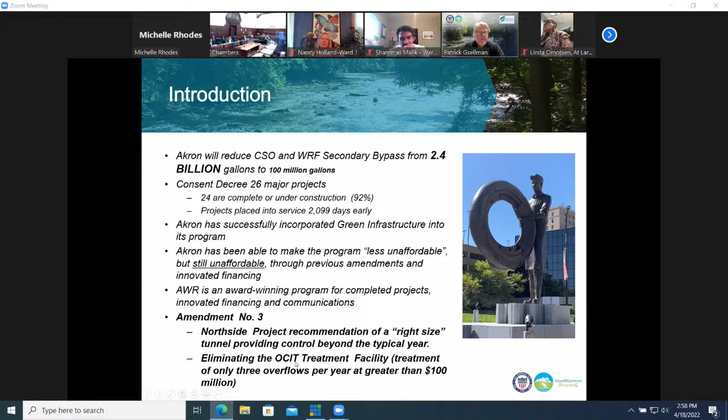And then again, today we want to talk about the Amendatory 3 that includes the North Side project and the elimination of the Ohio Canal Interceptor Tunnel Treatment Facility.

Just real quick, summarize some of the awards that we've received over the last few years, and we're very, very proud of these. Our mayor actually got an award from the state of Ohio, from the Ohio Water Environment Association for his efforts in regards to the environmental projects at Akron. And we've gotten awards for our communications that we've provided to our stakeholders and to the public and for our events we've had, and also engineering achievement awards for the projects themselves.

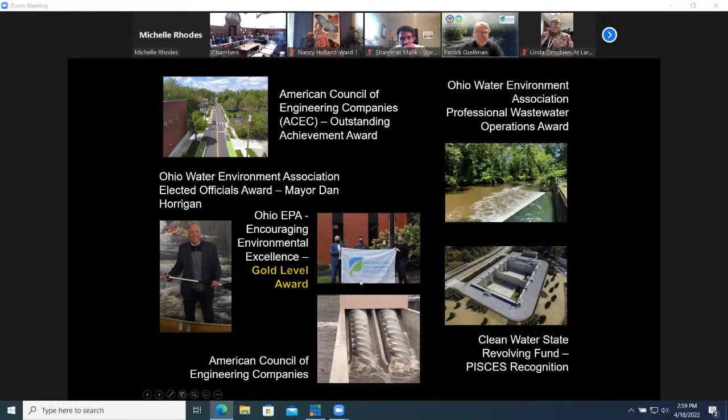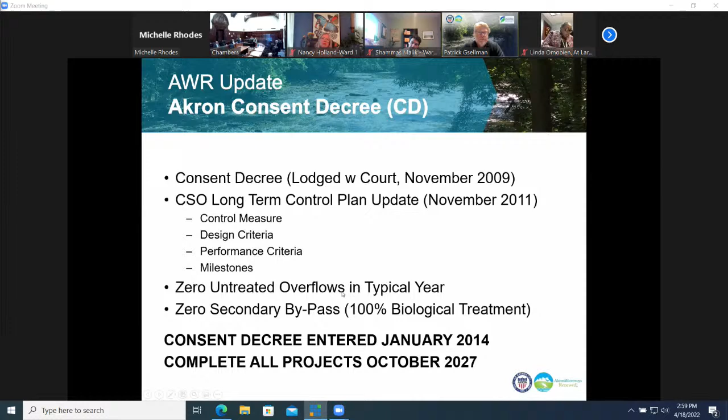A little bit of history. I don't want to spend very much time on this at all, but obviously we did have a consent decree that really got started back in 2009. It wasn't entered until January of 2014 in the court, and we still have the same completion date of October 2027. It does require 0 untreated overflows in what we call the typical year or average year, and it requires no secondary bypass at the water reclamation facility. And as the mayor noted, it is one of the most stringent consent decrees in the country.

We went through the integrated planning process back in 2015. Of these some 800 combined sewer overflow communities in the U.S., US EPA was finally realizing that every one of these projects were greatly exceeding their original cost estimates, and the majority of them required additional time. US EPA actually came up with a process called integrated planning to review these projects, to hopefully make them more cost-effective, more environmentally beneficial, and to help ease some of the financial burden.

Through that integrated planning process, we've come up with, up to this point, really 3 changes to the consent decree. One we call Exhibit 3, which was actually included in the consent to allow us to incorporate some sewer separation and some green infrastructure projects. And then the First and Second Amendment provided us to rearrange some of the schedules, come up with alternative projects to save money.

And specifically, the Second Amendment required us to incorporate green infrastructure, specifically out in East Akron, in the Middlebury neighborhood. That resulted really in some fantastic projects out there that not only eliminated having to build storage tanks, but allowed us to really do what I think are community improvements and enhancements with the green infrastructure.

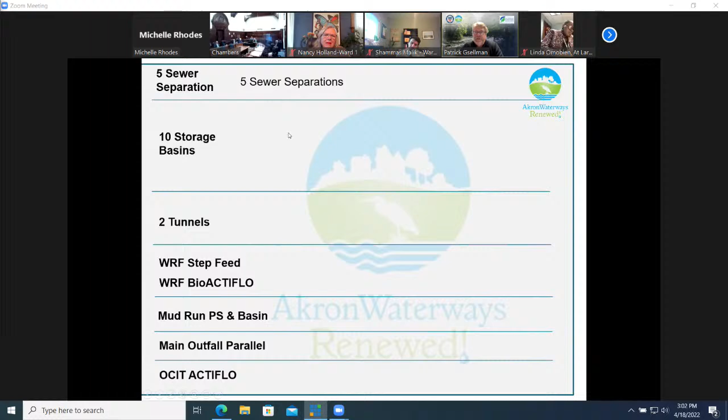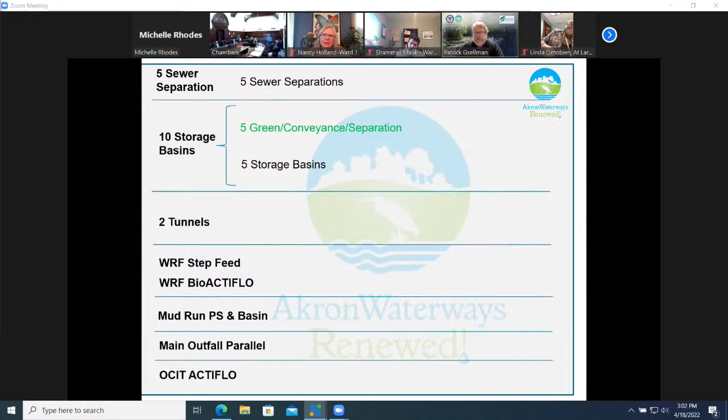Through the integrated planning process, we still did the 5 sewer separation projects. They were pretty much underway. Some of them were actually already completed. We did modify 5 of the storage tanks and provided green, additional conveyance and sewer separation projects. And if you're not quite familiar with what green infrastructure means, I've got some pictures later to kind of show you what those projects look like. Obviously, we did the Ohio Canal Tunnel. It's complete. The Northside tunnel is part of this third amendatory that we're talking about.

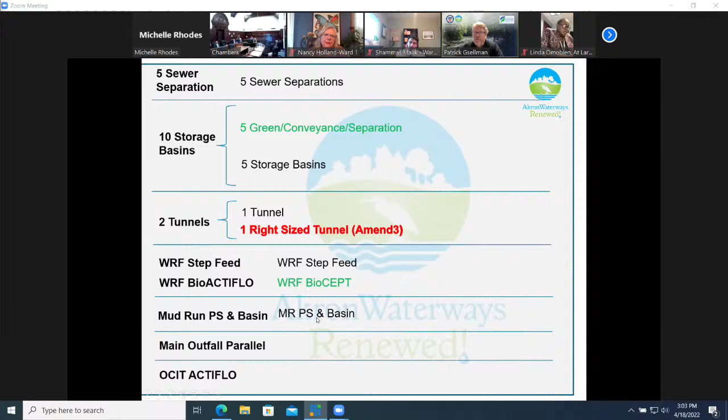We did 2 projects at the water reclamation facility. We actually changed the schedule of the step feed project, and we replaced it with a different technology at an improved cost, a lower cost, to treat the wet weather flow. Mud Run pump station was already well underway before we did the integrated plan. We did replace the main outfall with the main outfall cap, and OCIT ActiFlo is again under the third amendatory review. So these are the 2 projects that are left or under review as part of the third amendment.

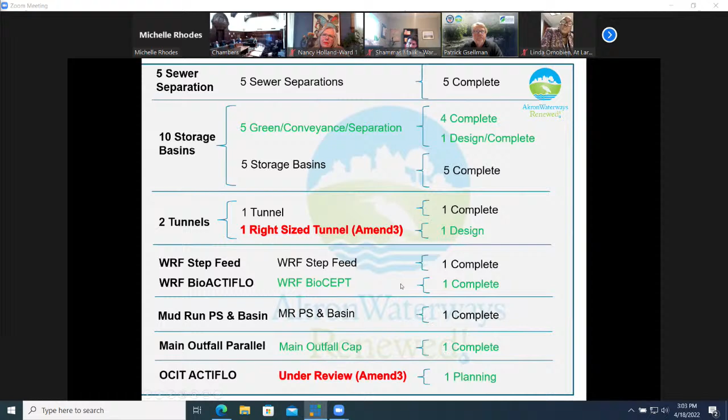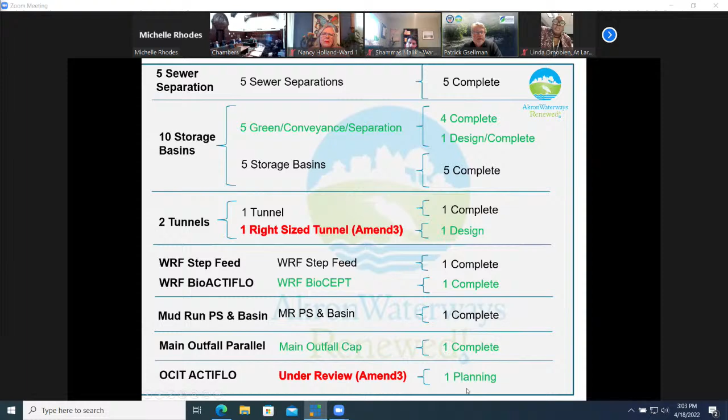And this gives you a quick update then on where we are with all the projects. The green ones are the integrated planning projects, and the black ones show the projects that were part of the original consent decree. And you can see the vast majority have been completed. It does show we're finishing up the second phase of one project down in Memorial Parkway. And we do then have the tunnels in design and the ActiFlo is in planning.

As the mayor mentioned, we've saved around $150 million in capital costs with the two amendments. And what I'm really proud of is our staff has been able to work with the Ohio EPA to come up with actual financial savings by getting these unbelievably low interest rates for all kinds of different criteria in order to save approximately $142 million just in financing. And we hope with this latest amendment we could save around $140 to $150 million with these future projects.

And then I'll give you a constant reference back. We started at 2.4 billion and now we're talking about 100 million gallons of overflow. Graphically, this shows what it looks like. We've completed, again, 92% of the projects. We've got one that's still under construction. And a huge price tag on the remaining 8% of the projects, or 2 projects.

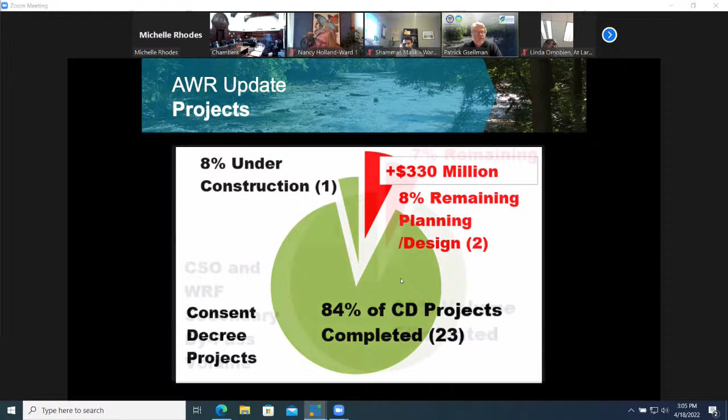And it's kind of like in life, you start out doing the projects with the biggest bang for the buck. So a lot of the earlier projects removed a lot more flow. And now we're left with the more difficult 2 projects that don't remove as much flow, and there's not quite as much cost effectiveness when it gets to these last 2 projects. And again, graphically to show the volume of overflow that's been eliminated. We've eliminated 93% of the CSO and secondary bypass, and we're down to just the 7% remaining.

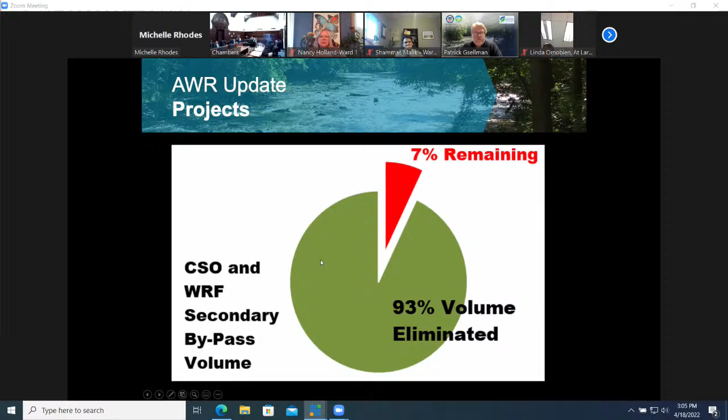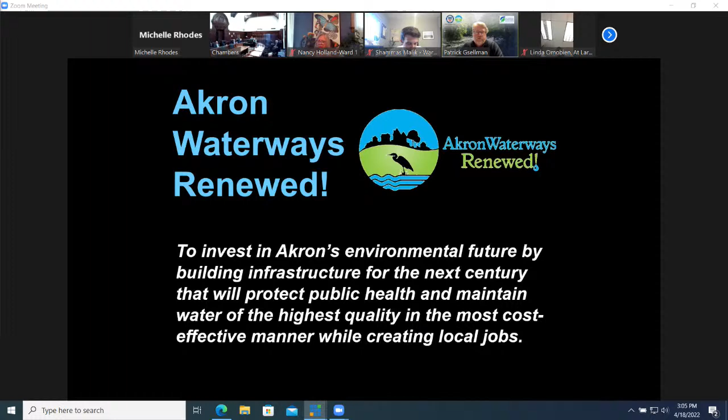We have kept with our mission, basically to invest in Akron's future for future generations, to protect public health and provide the highest quality of water quality, and also creating local jobs. Not only have the local jobs been created through contractors, but also with our consultant community. They also have goals for local hires and have been tremendously successful in accomplishing that.

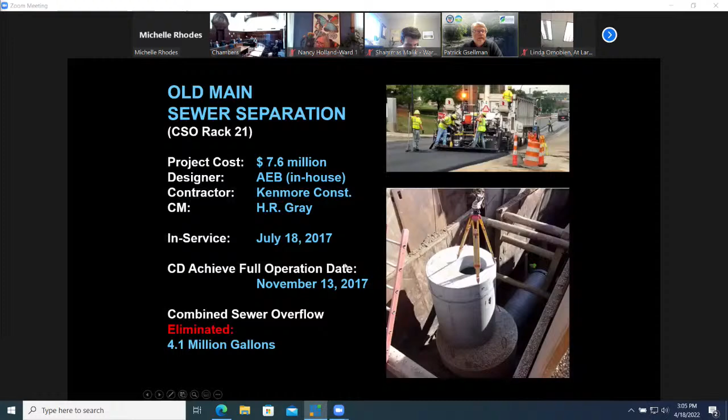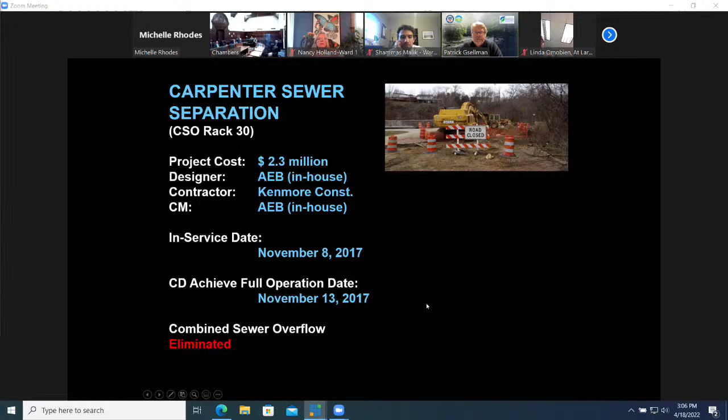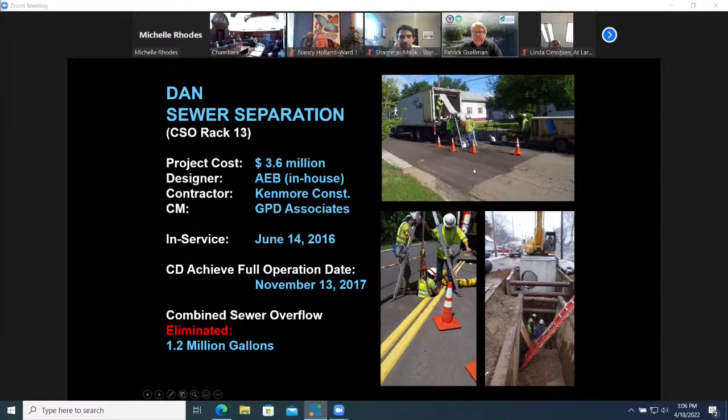And what it does is it puts this liner inside, then they harden that liner with the resins and with hot water and steam, and allows you to basically have a brand new sewer without having to dig up the street. And in the bottom right, obviously you know what it looks like when we have to dig up the street. With this lining process, we can actually do it from manhole to manhole and really reduce the amount of disruption that occurs doing these separation projects.

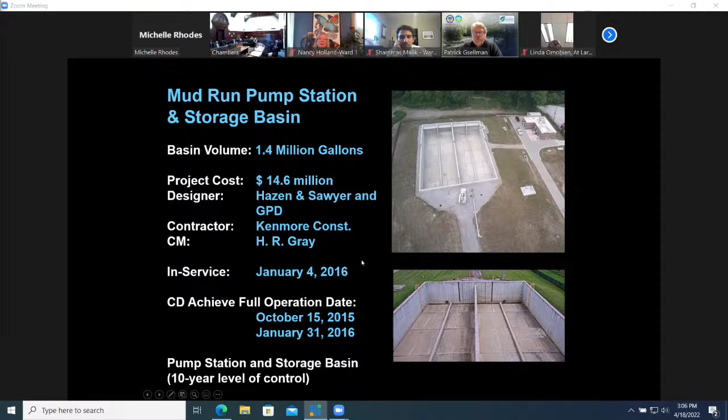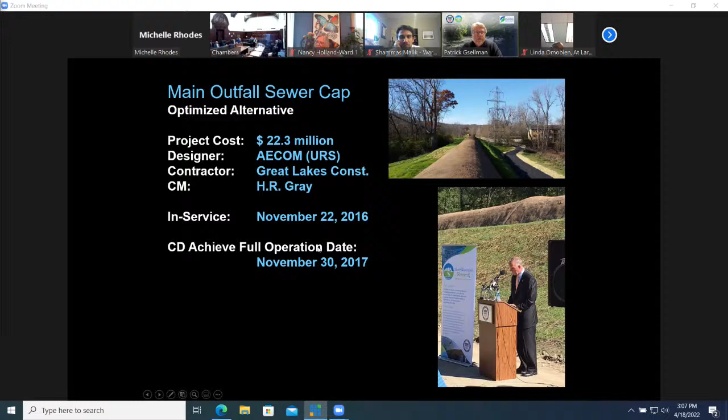This is the Mud Run pump station. Not only did we improve the pump station, but we also provided for storage of any potential overflow. This was that sewer where we were able to go down and cap the sewer down in the Merriman Valley along Riverview Road. And this was actually one of our earliest projects that benefited from the integrated planning process, where we saved a tremendous amount of money and also completed the project over a year early.

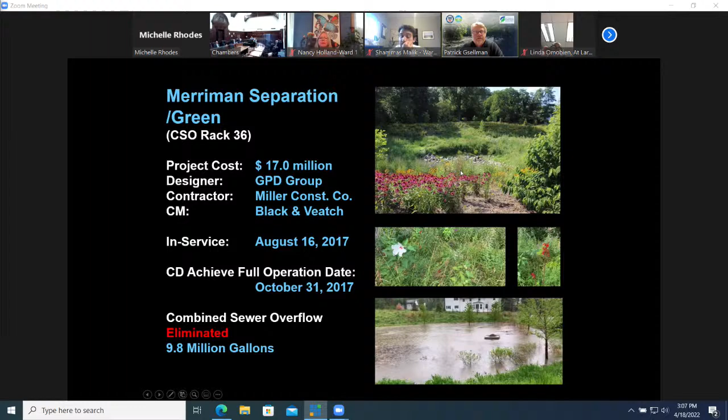Merriman Separation Green was one of our first green projects, and very, very successful. Basically, we ended up with this picture in the top right corner instead of a concrete tank, and we're really proud of this. People always ask, yeah, that's pretty, what's it look like when it fills with stormwater? The bottom right picture shows you what it looks like when it fills with stormwater, but all of the plantings inside where it gets submerged can withstand being submerged for a day or 2. And this had been submerged several times, and it still looks fantastic, and it shows you how it looks when it's actually operating. And keep in mind that was instead of a concrete tank.

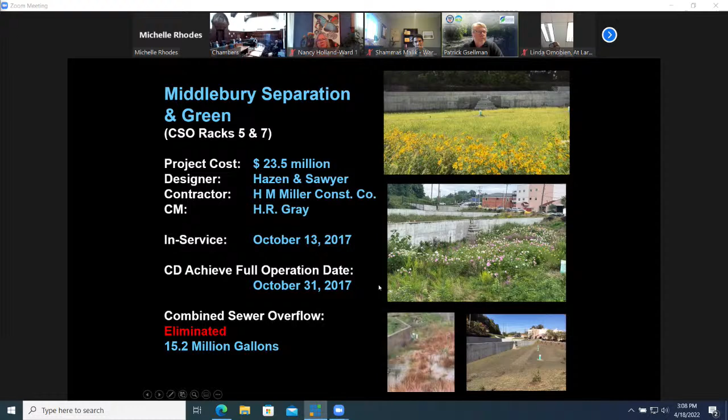But again, we actually created a wetland in the middle of the city, which, the flowers and the growth is fantastic, provides a great haven for the birds and the bees and the honeymakers in East Akron. Just truly a great project.

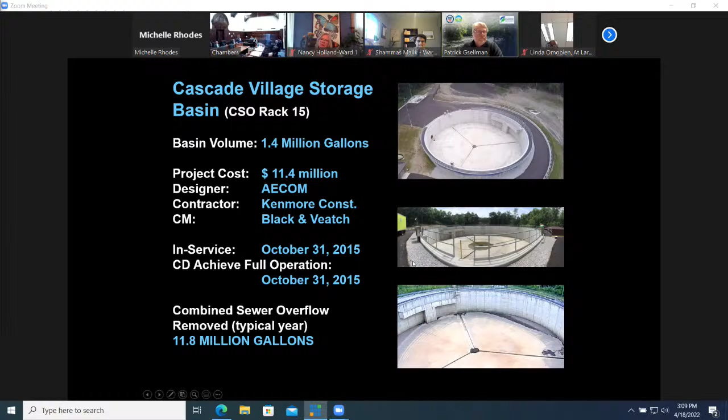So to kind of avoid some of the curiosity of people as to what's going on back there, and to keep the kids from being curious as to what's going on, they could just go into the community center and see exactly what's going on. And it also allowed the parents and the people in the community center to know if anybody was monkeying around in the facility. But again, one of our earlier projects, one of our smaller basins.

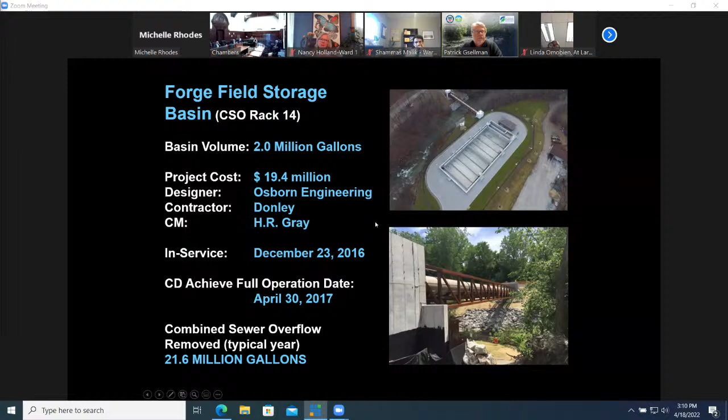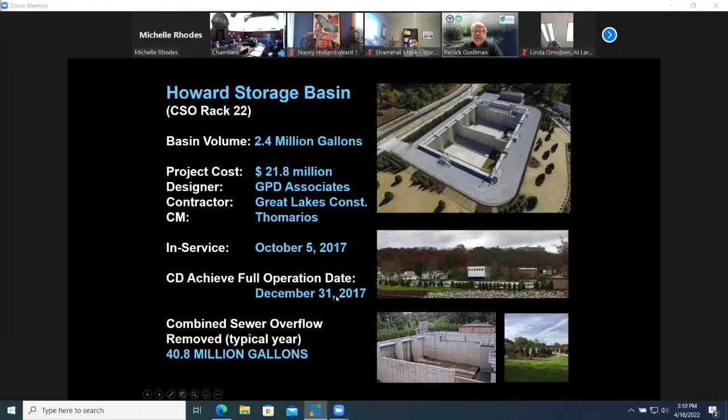Howard Basin on Howard and Calhoun Street. This one, because of the potential development in that area, we were very, very critical of making sure we landscaped it properly. And you can see the landscaping. If you're driving down Calhoun Street, I don't think you even know that this facility is there.

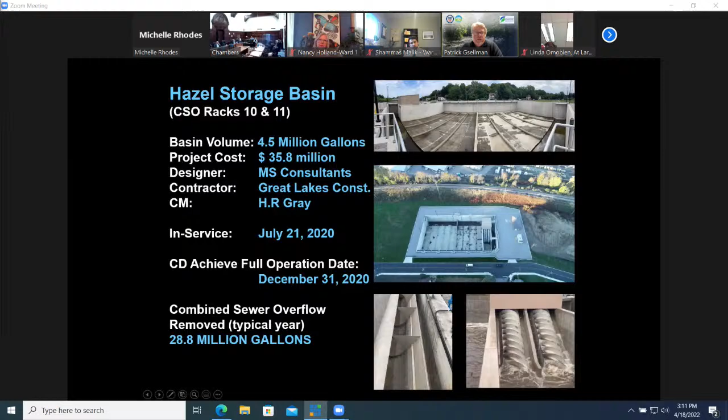Hazel was recently completed towards the end of last year. This is the only facility that we actually have to pump into with stormwater. The facility, in order to get the flow in, was just getting too deep in the ground. So we went with the Archimedes screws in order to pump into the tank during the higher flows.

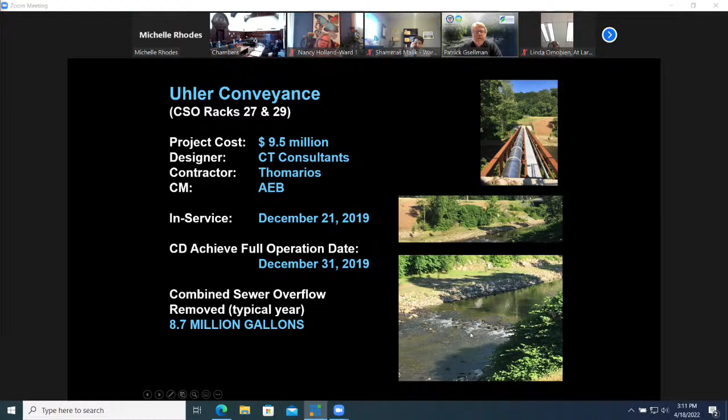There was severe erosion along the banks. By increasing this floodplain, it's reduced and almost eliminated the erosion, and it's allowed for fish passage now through here without the little low-head dam in there.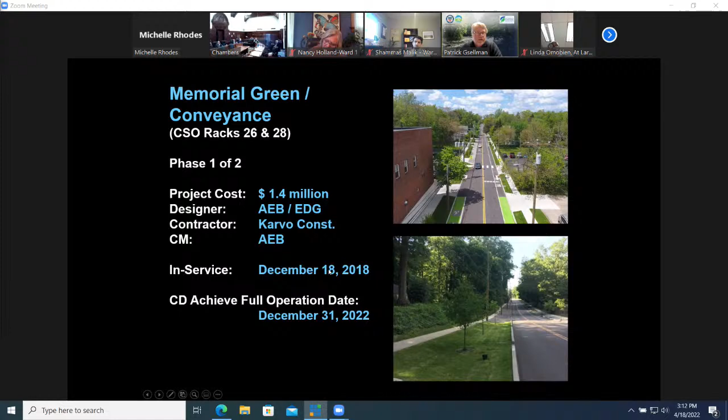Memorial Aqueduct, this was Akron's, I believe, first complete green street. This is part one of a two-part project, and this is the one that's still under construction. The aqueduct portion has been completed, but right now we're finishing up on Memorial Parkway with completing the connection for RACK 26, and then later in the year, we just did a project to do the storm sewer for RACK 28. So that project will be done this summer, and it'll complete this portion of this project.

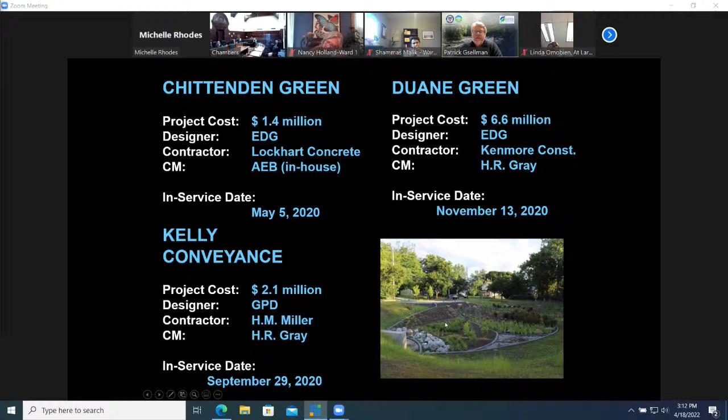Kelly Conveyance just really came out fantastic. Again, in lieu of storage tanks out in this area, we were able to separate some of the sewers and capture some of the stormwater and create rain gardens and vegetated swales. And all these projects have themes to them for East Akron. This one is actually a butterfly. We've got another one that's actually a footprint, like a rubber sole. And we've got this one is a fish that floats along.

This is the butterfly. This one actually spells out in Morse code, Middlebury, and does a great connection of the neighborhood to the school. But these just really came out fantastic, and I'm really curious to see. This is what they look like after the second year. I'm curious to see what they look like after the third year.

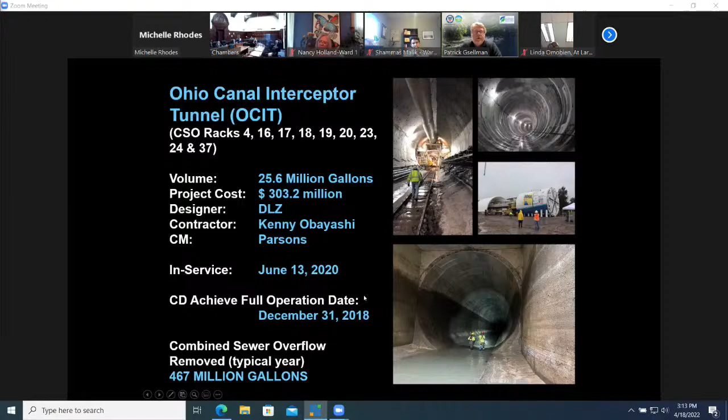And I think everybody's aware the Ohio Canal Tunnel was completed back in June of 2020. Been very successful in operating. It's exceeded our initial estimates on how much flow can be captured in the system as far as overflows, and we're learning how to operate this thing more efficiently every time we have an event.

And it just shows you the idea of the depth of the tunnel. I did want to point out, this one's a little different than the north side project we're talking about now, is that this tunnel not only went through rock, but it also went through soft soil and dirt. And it made it a very, very challenging project to have to go through both soil and rock. The north side project should almost all be in rock, which will make it a much more cost-effective project.

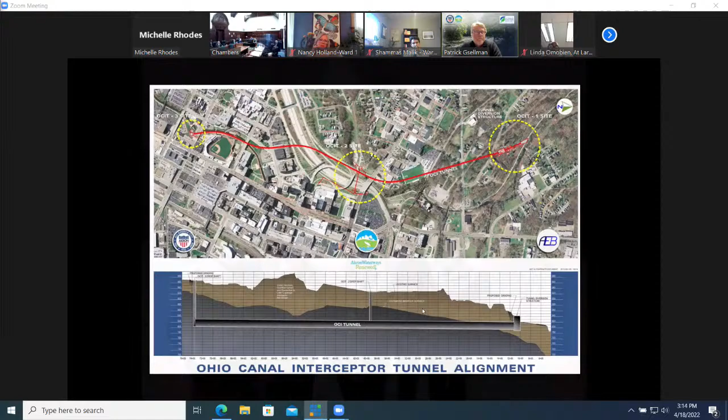Our water reclamation facility, we had a large project down there, and the bottom right picture shows, and those of you who haven't been down there, we need to get you down there for a tour. But when you drive down the Akron Peninsula and you see the tanks with all the bubbles and aeration going on, really what I like to call this is just a wetland on steroids. So it's using what nature does to treat wastewater by providing oxygen into the stream. It provides a biomass that actually eats and digests the pollutants as they come in. And there's just thousands and thousands of little organisms in here that are actually doing the job of treating the wastewater.

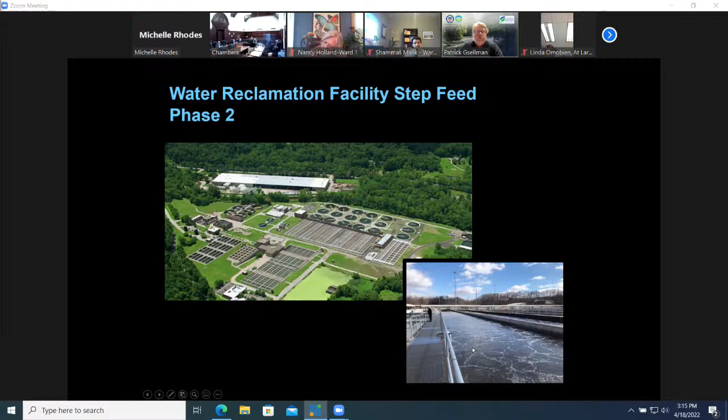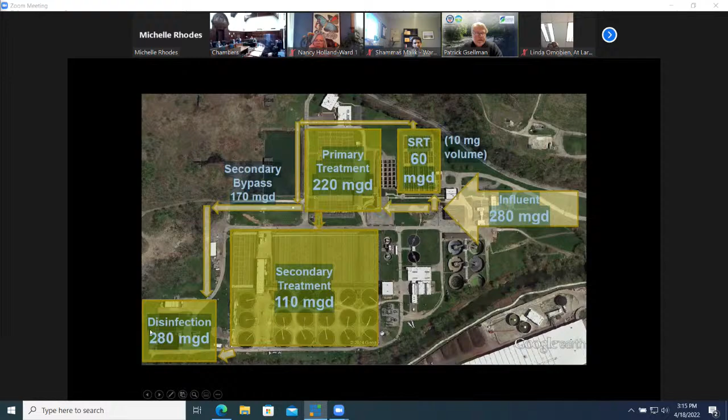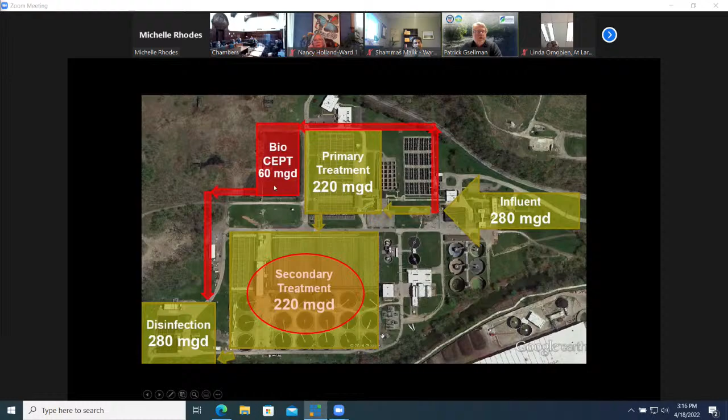Initially, this is what the plant setup was. Basically an overview, 280 million gallons would come into the plant. We could treat 110 of that with this biological secondary process, which is that wetland I was talking about. And then we would recombine the flow, disinfect, and discharge 280. Improving the secondary treatment process allows us now to get 220 through with biological treatment, which leaves only 60 million gallons that bypasses the secondary. So when I say secondary bypass, that's what this is in red. So it's not bypassing the whole system, it's more of an internal bypass. But we were required to provide biological treatment then of that 60 million gallons that would bypass this secondary treatment.

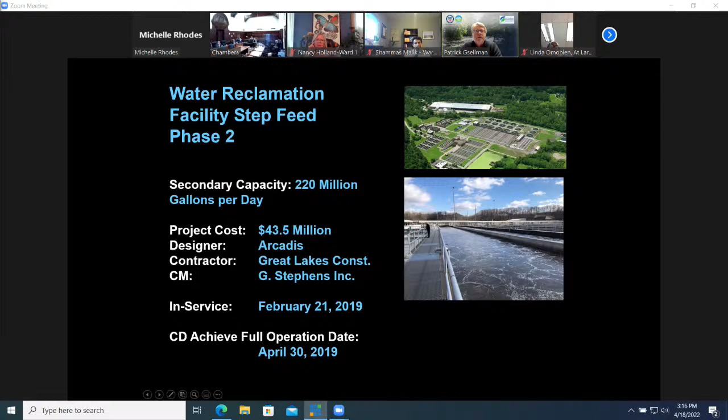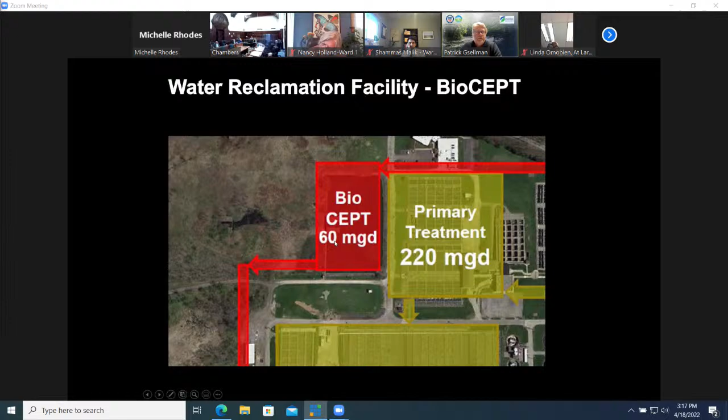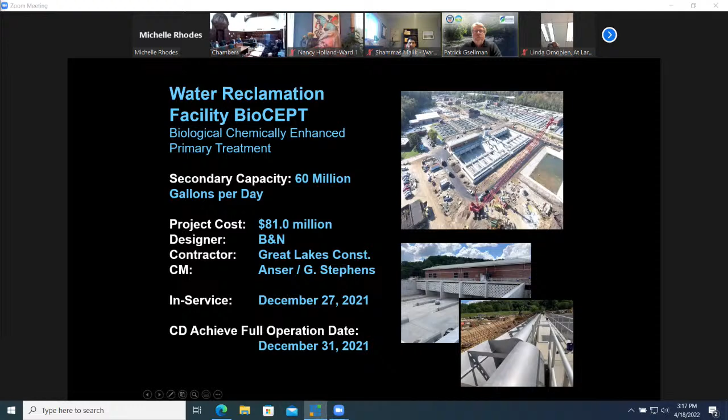Here's the cost of that project. It was finished up a couple years ago, over $43 million, and it really involved reconstruction of this entire middle area of the facility. The BioCEPT project then was just completed the end of last year, again treating the 60 million gallons a day with a high rate treatment. BioCEPT stands for chemically enhanced primary treatment, which is really just a faster way to use chemical to provide treatment of this during extremely high flows. And here it shows it just as it's being finished with construction. This shows what it kind of looks like inside the tank. So this actually provides biological treatment and settling all in one tank at a very high rate, much higher rate than what the secondary process does. And there's an aerial view of the completed project.

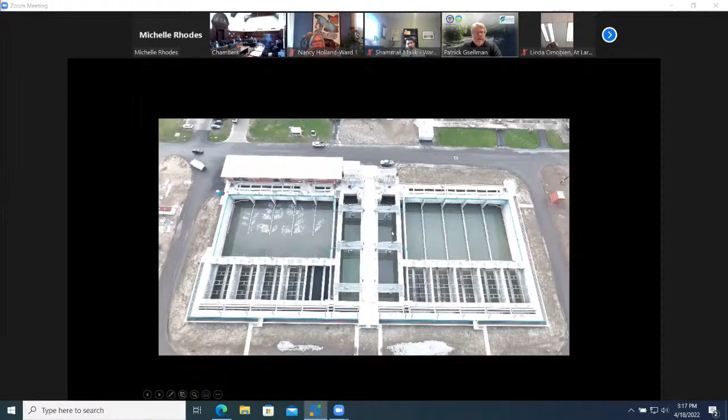And one thing I want to note about those two projects, we basically had the middle of the plant all torn up for a couple years. We had the end of the plant all torn up for a couple years, and now we're working on the headworks. The water reclamation facility staff and operators have done a phenomenal job of operating the plant. During all this construction, the plant still had to maintain compliance with its permit. And they just did a fantastic job of working around the construction to make sure that the wastewater was still properly treated before it discharged into the river. And I can't say enough about their abilities to work with our contractor to make sure the plant stayed operational.

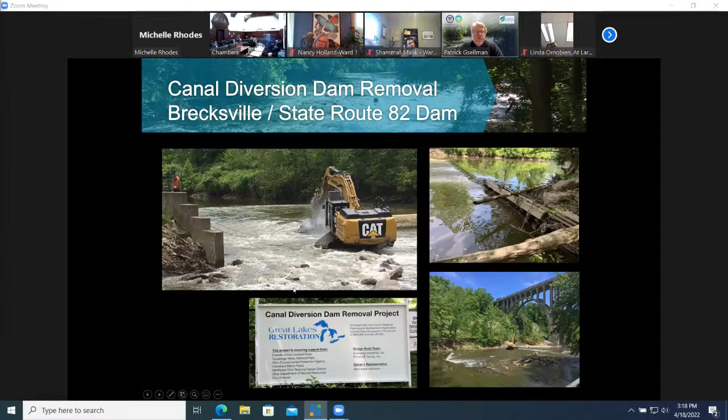One of the last projects that I wanted to mention in regards to the consent decree projects that are completed is part of a supplemental environmental project in the original consent decree. We assisted in the removal of the Brecksville 82 dam, and this shows the dam being removed. And what this did was eliminate the dam that was out there and allow fish passage through this area and into Akron. And they're already finding significant numbers of fish finding their way in the Cuyahoga River, into the Cascade Valley Park, and up the Little Cuyahoga River, right into downtown Akron. These are fish that in the past could not get there because of this dam. So through this dam removal, it's improved the water quality in the city of Akron. And here's a little before and after picture of what it looked like with the dam and without the dam.

Talk about construction projects, updates. Again, there's only a couple projects left. The Headworks project located at the front end of the plant that removes the heavy grit and screens the plant are being completely redone.

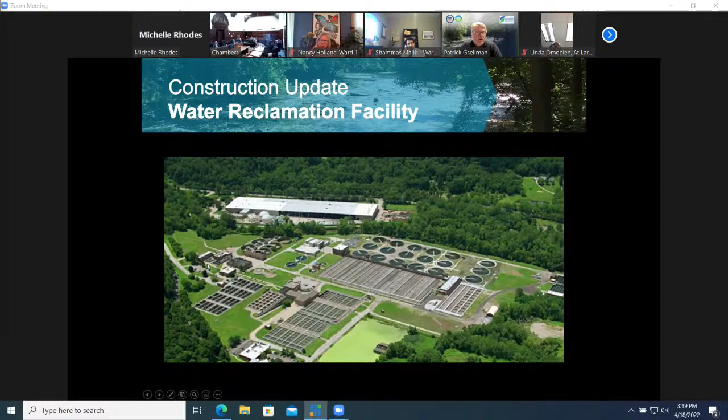And this all kind of goes into our affordability calculation, is there's other work that has to be done in the sewer system that's not required in the consent decree that we have to keep up with.

And this is another one of those benefits, ancillary benefits. This is next to the Ohio Canal where it discharges into the main outfall sewer. And this is what the Little Cuyahoga River looked like before the project, and this is after, before they planted the trees. And you get a chance to go down there. The towpath is right up here. What a phenomenal restoration this project was.

And you can see the ripples in the water as it comes down, creating this fantastic habitat. And we were able to create a little outlook right here off of the towpath. But you need to get out there to see this. And who would have ever imagined the Little Cuyahoga full of old broken concrete and old sewer pipes and all kinds of trash could look like this, again, right in the middle of town, right off of Howard and Cuyahoga.

And that little fish in the picture came out of where the ball fields are at Forge Field. One of the guys was fishing there while he was playing baseball and caught this just right upstream from this location.

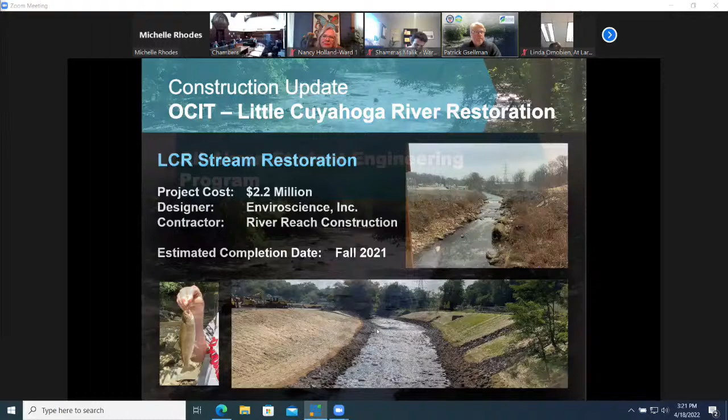I did want to mention that the Akron engineering program is going strong. I think we've got around 45 students this year that we've provided workshops and training. And this is for juniors and seniors in the Akron Public Schools. And they will actually have paid internships with our consultant community.

So our consultants that we've been working with to do all these projects are actually providing jobs and internships for these students. And we're really excited that we've now got Goodyear and FirstEnergy have come on board. And Goodyear's already offered a couple of them full-time jobs, and they're helping them through college. So just a phenomenal program that continues through.

Down to the meat of the topic, amendment number 3 is the projects that are left: the Northside project and the Ohio Canal treatment facility. Northside project, this is the requirement in the consent decree, requires us to build a tunnel with a certain length and a certain volume, and required to be bid in '23 and fully operational by '26, with no overflows in a typical year. This is the initial layout of the tunnel.

Here's North Hill, Cuyahoga Falls, Gorge Dam, Front Street, Cascade Valley down here. So it shows the tunnel coming right along the top of the slope. The green one is the existing sewer. Down here is Peck Road and Cascade Valley.

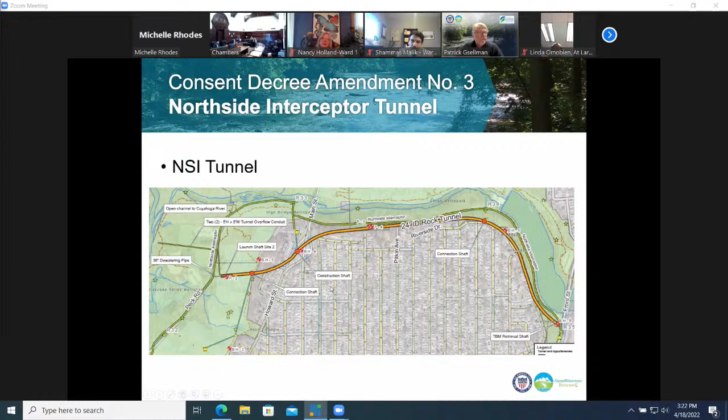Some of you may remember, because we did look at an integrated planning project, that we proposed actually separating the sewers instead of building the tunnel. And this shows the magnitude of some of the areas that would have been separated.

We went through the analysis, we redid our modeling, updated our modeling, and it actually ended up that the costs were starting to exceed our estimates significantly, and the challenges of constructability of separating those two areas became greater. And you can see the costs of either the original tunnel or the right-sized tunnel are significantly lower. And the difference even between the two tunnels is around $40 million.

So a decision was made. We did get EPA to agree on all our new modeling that was done. But because of those changes and challenges, we decided to go back and actually recommend doing a right-sized tunnel.

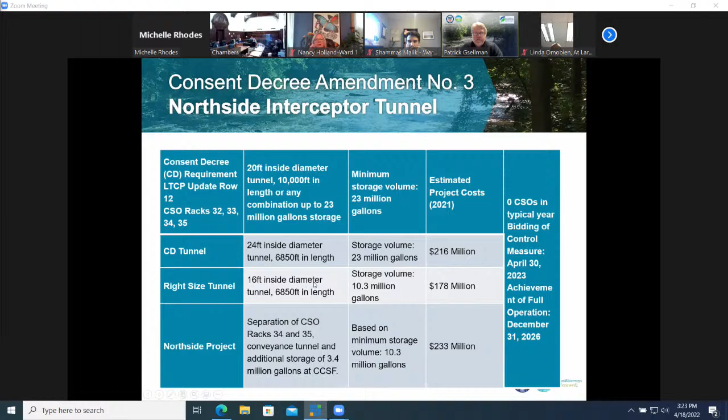So through this planning process, we did decide that this wasn't going to work, but we did determine that we no longer needed to do a 24-foot tunnel, that we could meet and exceed the same performance requirement with a smaller tunnel. And that became our recommendation, to do a right-sized tunnel, a 16-foot tunnel, that meets and exceeds the performance criteria with still no overflows in the typical year.

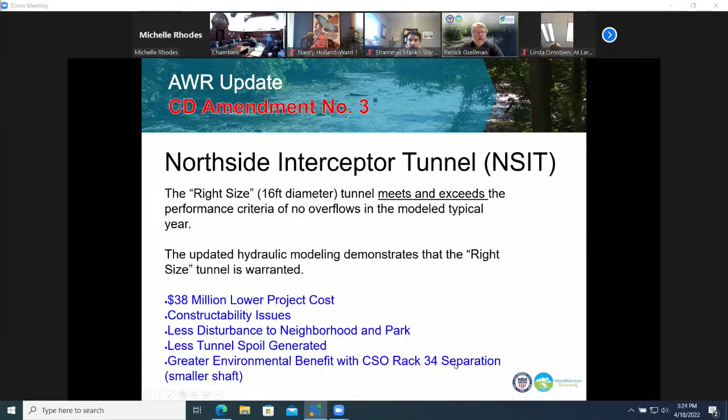And we fully demonstrated with our updated modeling that the right-sized tunnel is warranted, and this shows some of the benefits. Almost $40 million in project costs. It eliminates construction issues with a larger tunnel, less disruption in the neighborhood and the park, generates less spoil, and we've also looked at separating the rack 34 area, that much smaller area.

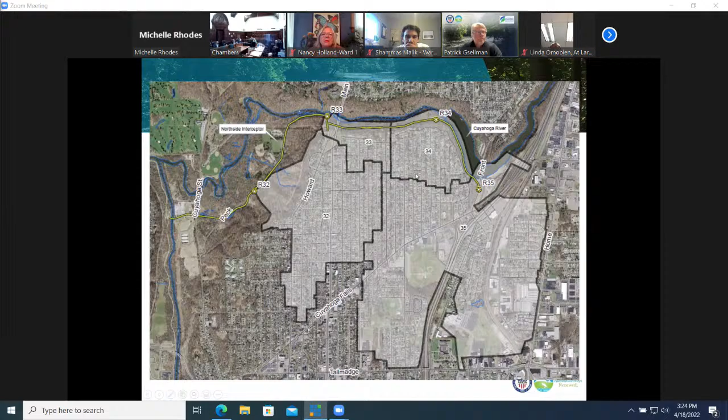If you look at the diagram here, go back one more, you can see 34 is a lot smaller. We actually determined we could do a significantly smaller shaft on the tunnel by separating this little area. So we've actually proposed to do the right-sized tunnel along with this separation, and showed that it's still economically feasible and more cost effective. So that's the proposal for the north side tunnel.

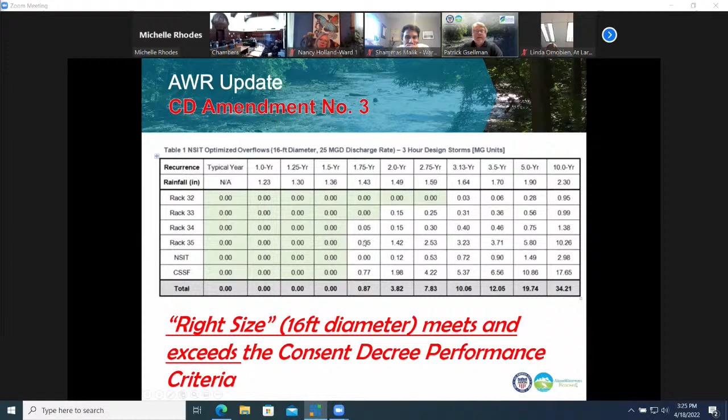The mayor briefly mentioned the dispute resolution that we're in, and this gives you the whole dispute resolution process. There's a specific portion of the consent decree that provides for these disputes and how we go through them. Initially we went through an informal dispute resolution, which was extended once, and then we agreed to an extension of another 19 days, which actually gets us to tax day. April 15th was the end of that informal dispute resolution.

Since it's not resolved, the city of Akron has 30 days to ask US EPA for a formal dispute resolution, which is basically a white paper that we submit stating what our case is, and we have to submit that prior to May 15th. That then starts a formal dispute resolution, again just with EPA and the Department of Justice. Then they have 45 days to respond back to us. If they're still not in agreement with us after that 45 days, we file a motion in federal court, and we have to do that within 15 days.

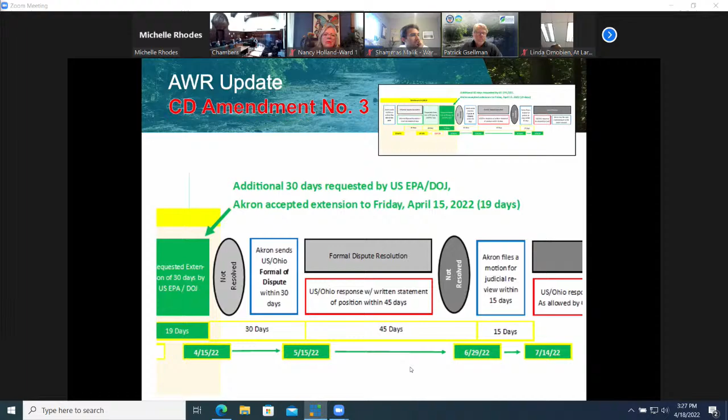So you can see that gets us to sometime in mid-July, when if we don't have agreement, we would be going to federal court with this dispute, and then the court finally decides how that's resolved. But right now we're in this 30-day period, and we don't have to take all 30 days to notify EPA of formal dispute resolution, and then that starts the 45-day period, which puts us into July to go to court.

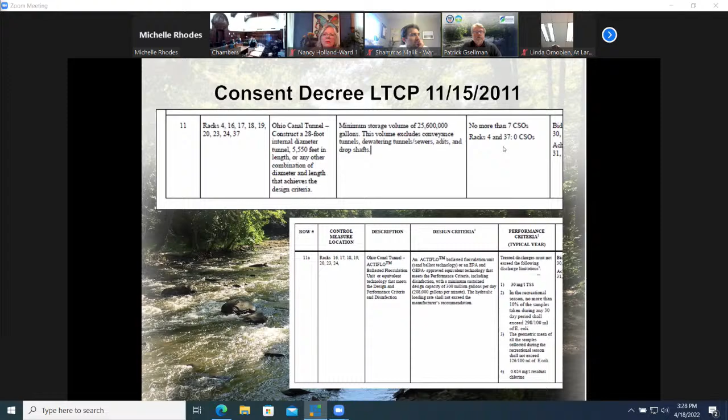This has been discussed with EPA, and we've provided them all kinds of information on the treatment at the end of the Ohio Canal Tunnel. This isn't part of the dispute resolution yet, because EPA hasn't given us their answer. But this requires us to build a treatment facility at the end of the tunnel to treat 7 overflows at a volume of about 190 million gallons a year.

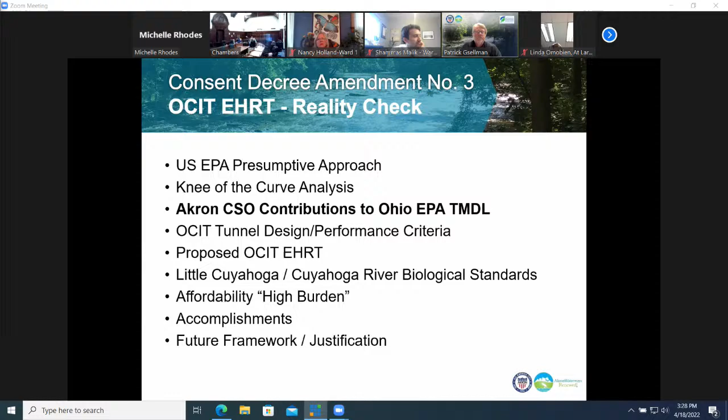We went through this and did what I like to call a reality check as to whether that treatment should still be required. I'm going to quickly go through some of these to tell you the status and why we don't think that treatment facility is required anymore. The one I want to highlight is what they call the total maximum daily load. I was warned not to get too technical with the acronyms, but basically Ohio EPA reviewed all of the discharges of bacteria into the Cuyahoga River. Then they allocated certain loads of that bacteria to all the sources.

Some of the other things that go in with that: because the tunnel that we built is performing better than anticipated, we've actually gone from 7 overflows down to 3 overflows per year projected. And we lowered the annual volume from 191 to 100, which makes this number even lower when you look at how well the tunnel's performing. When they were requiring treatment, it was 7 overflows and almost 200. And now we're down to 3 overflows.

Running through those things on that list that I showed you previously, EPA also has a category they call a presumptive approach, that with most other communities, if you're at 4 to 6 overflows per year or 85% capture, you're meeting your requirements. We've shown we're going to be at 0 overflows everywhere in the system except for one location, which would have 3 overflows, which is significantly better than 4 to 6 overflows per year.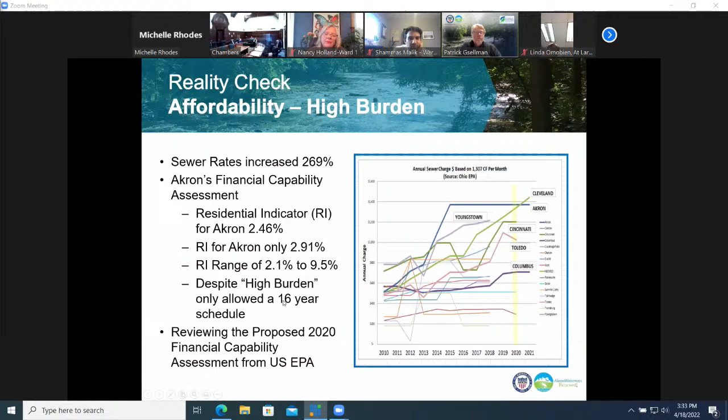And generally, we're looking at almost 2.5% of median household income going towards their sewer rate. And in the lower 20 percentile of median household income for the city of Akron, they are almost up to 10% of their income, which is just outrageous. Almost 10% of their income goes towards the sewer. And we're really saying that it's always been a high burden. It remains a high burden, and it's unaffordable, even with the approval of this amendment.

And one thing I would note that I didn't talk about: at the very end, our sewer system is really what we call a smart sewer. We have meters and level sensors throughout the whole system that actually tell us how the system performs every time we have a rainfall. And we're able to optimize our storage tanks and the tunnel, and we'll be able to optimize this new north side tunnel. Every time it rains, we optimize our system, and it gets better and better in the amount that we can control. And it's called a real-time control system. And we've shown tremendous success with that program.

And so if it only rains in part of the city, the north part, we can store all the flow in the southern part and then treat the northern part, or vice versa. So again, our operators have done a fantastic job of implementing this. Every time it storms, they're looking at their charts to see, well, where should we send the wastewater? Where should we store the wastewater? How much can we treat? Do we need to activate more treatment facilities down at the water reclamation facility?

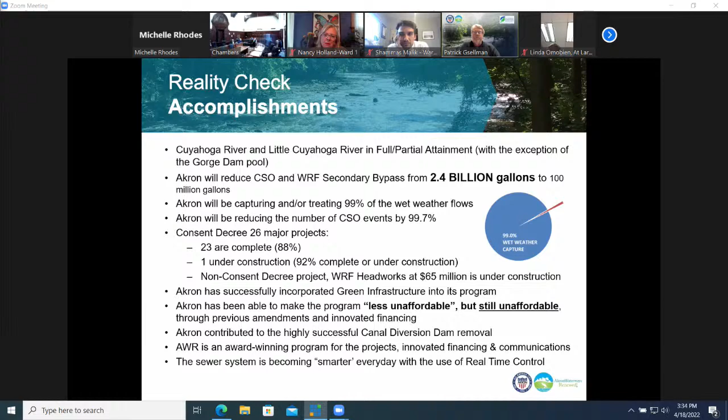So the takeaways, and I think you're well aware of this: Akron is committed to its Clean Water obligations under the Consent Decree, 100%. We agree with meeting our obligations. We just feel that there are some ways we could do it smarter and more cost effectively. We're committed to our mission statement of Akron Waterways Renewed. We're committed to ensuring that the disadvantaged communities benefit equitably from the investment that's going on, and the mayor will get into a lot of that with Justice 40 in the near future.

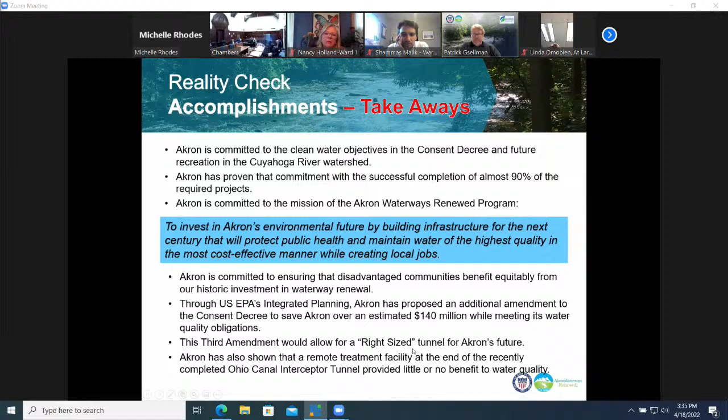Through the integrated planning, we're estimating about $140 million in savings through this third amendment. And the third amendment, obviously, is this right sized tunnel for north side and eliminating the remote treatment facility. Akron Waterways Renewed restored the path forward, the smart investment and cost-effective improvements for water quality. Our sewers get smarter every day and will continue to get smarter every day. And again, making sure it's affordable for the most vulnerable residents in Akron. We really are looking for your support on the north side tunnel for the right sized sewer, and also for eliminating the Ohio Canal Tunnel treatment facility, at that $140 million savings.

And I just want to wrap up with our communications. A lot of you have participated in this in the past. We are returning to the Blue Heron Homecoming down at the Cascade Valley. All the community centers are getting excited. We're trying to get all the kids available to come out there. We had a fantastic time the last time we met down there. Unfortunately, the river was a little high, so we couldn't do some of the river activities, but we're hoping we can do it this year. But you definitely need to get this on your calendars. We're looking for a great time for the Blue Heron Homecoming again.

So with that, that's all the formal part of the presentation. I apologize for taking so long, but as you know, it's a huge program, and it's been a lot of years. Tremendous success that we're very proud of, and we really want to continue that success with this third amendment. So with that, we can defer to any questions you may have. Thank you very much for your patience. Thank you, Mr. Gsellman, and I think you did a good job, for an over $1 billion project, of being able to cover it in such a short period of time. So at this time, I do see a hand from Ms. Holland, if you would, please.